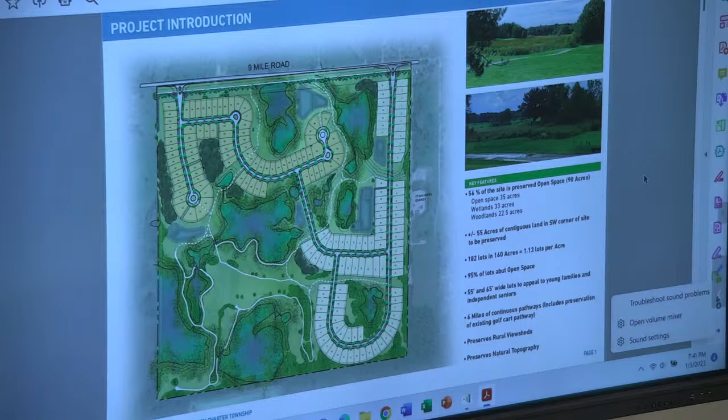Evening, Brad Streeter, I'm a planner with MKSK, address is 19546 Beverly Hills. Tony covered a lot of things I was going to cover, so I'll try not to repeat and just add some additional things.

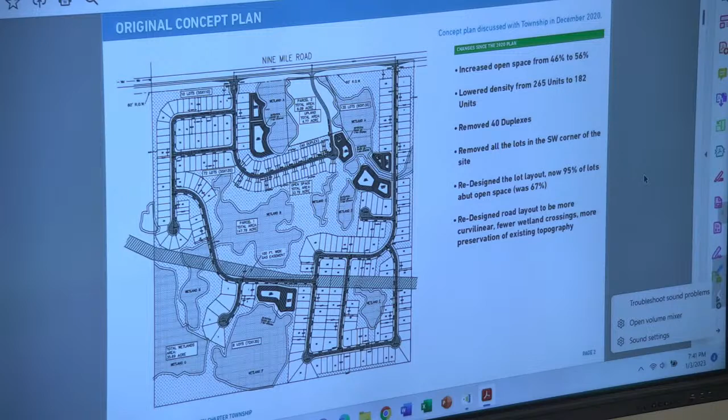Tony mentioned there was a plan presented before to the engineer and the planner, so this is that plan. There are a lot of changes made from that plan to the one we're presenting, and this is in your packet. We've reduced the density, got rid of some development in the southwest corner, and improved the overall layout with the new plan.

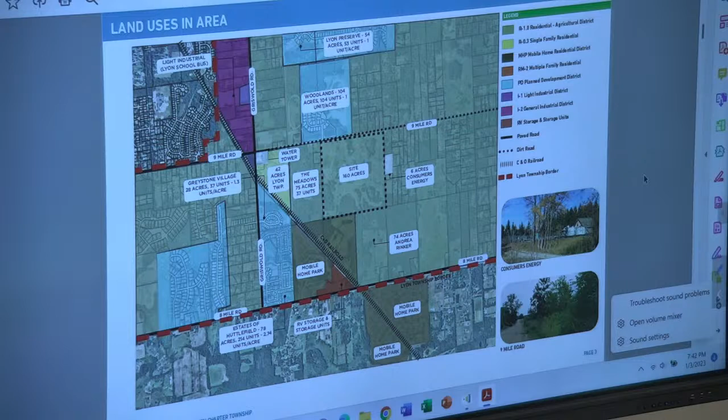Just to give a little overview, this is our site in the middle, showing the variety of density in the area. The density to the north is about 1 unit an acre, and to the south it's higher, like 2.5 units per acre. The Meadows, directly to the west, is the anomaly with much lower density, but it has limitations because it only has one means of access, which reduced their density, and has a lot of wetlands. So we're in the middle of lower density to the north and higher density to the south and west, and we think we've carved the right niche of density in consideration there. We also included in your packet a density calculation to show the variation within the area.

As we put together the plan, we have two different lot types. As Tony said, we have 55-foot lots to the west, the darker yellow, and 65-foot lots to the east and southeast. Those are typical photos of what the houses would look like there, and we were looking at a minimum 5-foot setback and 15 feet between units.

The idea of this plan is to reduce the lot sizes and setbacks from the typical 30-foot setback between units, because to get that 56% open space, you have to reduce the lot sizes and side yard setbacks. As Tony said, people don't really enjoy the side yard, they enjoy the rear yard, so 95% of the lots back up into rear yard. You're going to enjoy the rear yard because that's what most people see, and the side yards have been reduced so we can have that open space in the southwest and throughout the area.

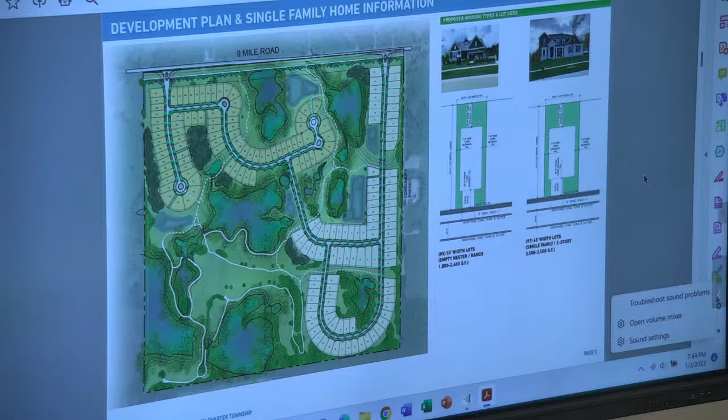And again, the Meadows to our west doesn't have those amenities that we are providing.

One of the things the Planning Commission asked about - some felt the side yard setbacks were too narrow and preferred the typical 30 feet. But again, you can't come up with 56% open space and preserve that 55 acres in the southwest if you have to have 30 feet between units. So since that meeting, we did different iterations of side yard setbacks of 10, 15, or even 20 feet between buildings, because we could reduce the size of the houses and still fit them into the 55 or 65-foot lots.

This is also new from the Planning Commission. We looked at some other areas that have setbacks similar to what we're proposing. Some of these projects, actually Alan Green, the attorney, and I have worked on in Novi, where we have maybe 25% open space, went with 10 feet between units or 15 feet between setbacks, and they only had 25% open space, not 56%. West Bloomfield, in the upper left, is another project that had about 22% open space and went down to 10 feet between buildings. So we think there's a lot of good quality development in Novi and West Bloomfield and other places.

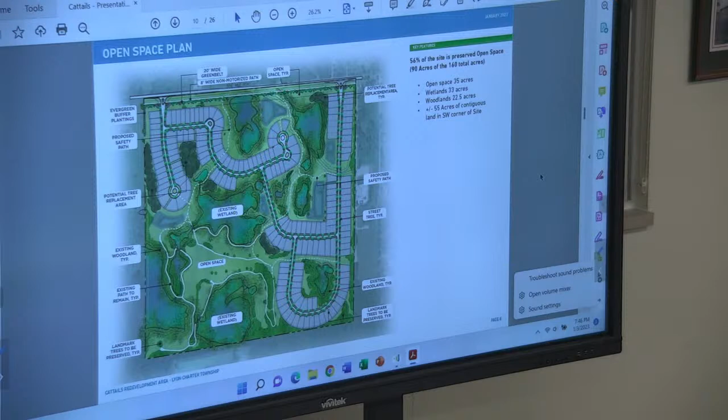James from MKSK is just going to do a quick overview of some of the key vistas of the open space, which we didn't show the Planning Commission, but we wanted to show that too. So I'll turn it over to James.

Hi, good evening. I'm James Goff, a landscape architect with MKSK. So as Brad mentioned, there's a landscaping component to this whole PD process.

Over the past few months, I've been able to dive into the township ordinance requirements, and I came away with three main takeaways: you have to have a buffer zone between different uses, an internal street tree requirement, and a green belt buffer between the development and 9 Mile Road. While all these are technically required, we still feel they'd be a really nice complement to the existing vegetation on site and a nice way to blend the natural with the built environment.

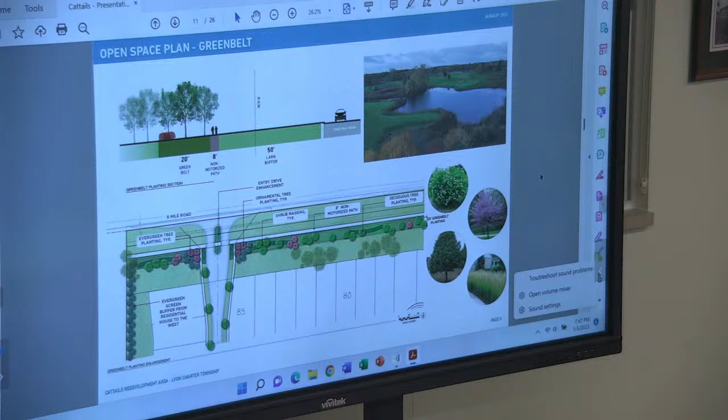So what you're looking at here is a greenbelt enlargement plan, and it would basically be a mix of evergreen trees, deciduous canopy trees, ornamental trees, and shrub massing. So that's just a glimpse at what that would look like.

Tony was able to get a drone out here on a nice fall day and got some really great shots of the property. What we wanted to do here was show the different areas we were going to preserve and the different areas we were going to develop.

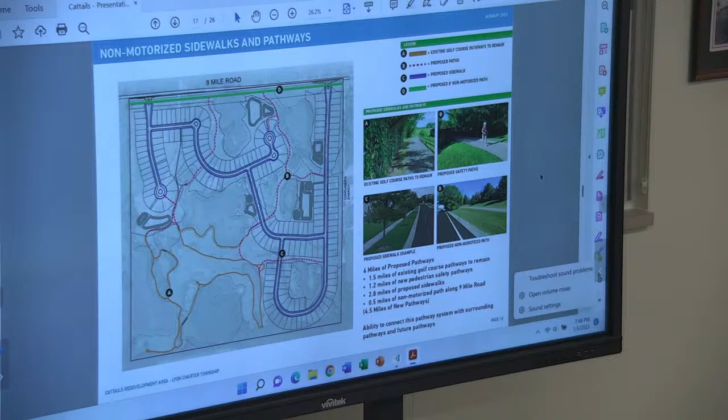So this is a pathway plan we put together. As mentioned before, there's over 6 miles of paths - 4.5 miles of proposed paths and 1.5 miles of existing pathways. The existing pathways are in orange, the proposed pathways are the dashed red. The blue is the internal sidewalks that circulate throughout the site, and at the very top, the green is the 8-foot shared use path along the front of the property.

So with that, I'm going to let Fadi talk about engineering. I think there is one for utilities - is that the one? Fadi Khalil from Angle Design, I'm the civil engineer on this project.

What we did with this project - I'm going to talk about utilities. First, the water main: there's a water main that was extended through a different project just across the street, on the north side of 9 Mile Road, on the west side. We're extending that all the way to cover the property on 9 Mile Road. It's a 16-inch water main, extending all the way east to the east property line, plus we're looping that water main throughout the property to serve all the lots with an 8-inch water main.

The sanitary system, the same thing - there's a 12-inch sanitary sewer across the street also, north of 9 Mile, and we're going to extend it. We're going to extend it south of 9 Mile, and then extend it east and west to cover the property from the east to the west property lines.

This is for future, if you want to extend it, water and sewer. Plus the same thing within the property, we're proposing for now an 8-inch gravity line. When we do the final design, we might increase that size to 10-inch or so, but we'll do that later.

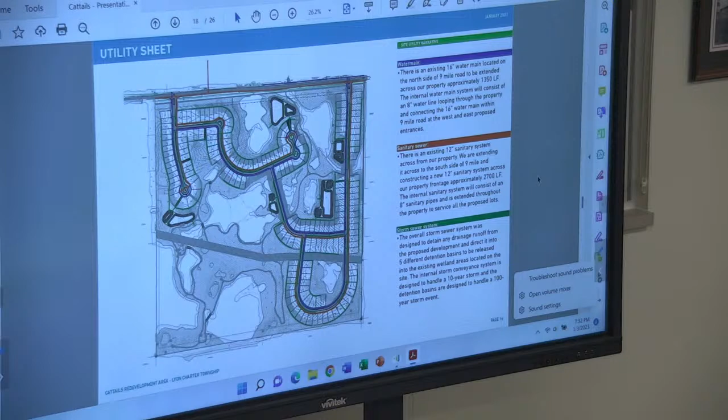Good evening, Happy New Year to you all, that was a fast year. I'm Alan Green, counsel on the project.

My role has primarily been to advise on the PUD requirements and help the team put together and meet the requirements. If the project gets to the point we hope it will, I'll be working with the township on development agreements and other legal documents.

But I did want to comment, we missed a couple things. One of the things the project was intended to do, as well as preserve all the open space and topography, was to preserve the rural view shed. You'll see that in the material. When you drive by this project, you're going to see visually landscaping, open space, existing trees, things like that.

I've worked on a lot of projects before, and this was a lot of fun in the sense that it started a couple years ago with the concept plan, but we've really been working for the last year on the project.

I think I've participated in 12 different development team meetings, and Tony, the owner, is committed to preserving the beauty of his property. So we sit there and look at the different levels of topography, what the view sheds would be. These folks went out and took golf carts and rode across all the property, and then we saw the videos.

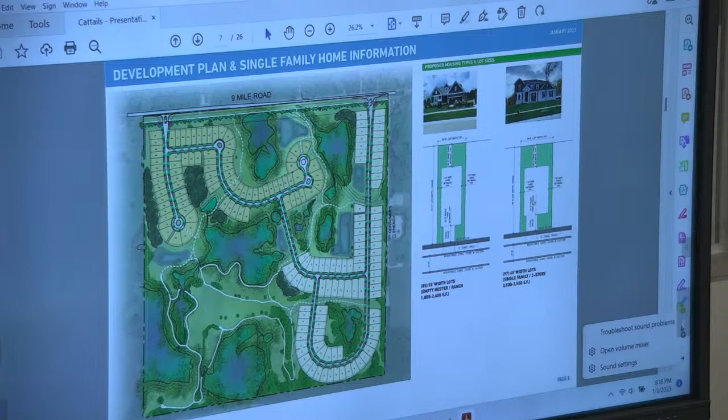And I think, James, we're trying to keep all that kind of stuff the way it is, just to create what you're saying. The things you're bringing up, we haven't shown in these because we're getting more into topography, but we're going to show the views from the road to show some of the things you're saying are captured with the layout. It's not very clear because it's 2D now, but when it's 3D, I think you'll see that.

And I know you guys have been working on this for a while, and you know what you're doing. I'm just asking because I don't have the benefit of knowing how some of those conversations went. And you made a good point.

We did have several earlier plans that had housing. It was moved. We had housing in some of the park that's being preserved. There's area there, and those were, if you're thinking about buying a lot and having a house, those are the most valuable properties. Sure, I mean, it's gorgeous.

And then everybody's just talking about, make it special. What's special? A large contiguous area where everybody can enjoy. And we talked about, the question was raised about what we might do with some of the open space there. We did talk about prairies. We did talk about some of it maybe being amenities, if you want to have any amenities on the property for the residents, whether it's a soccer field or something like that. We talked about all that.

We're going to explore that. But we decided to have something that large.

And we talk about connectivity. We're proposing, you'll see, there's the development on the other side of 9 Mile. We're proposing to allow connectivity to that. We're going to have sidewalks across our frontage, of course. Somewhere, we've looked at ways to connect it other places right now, but someday it can be. We're not going to restrict it. We're going to have this open in such a way that people could ride their bikes and go through here and be able to enjoy it. So you raised a good point, and we've talked about that, and we'll look at it again.